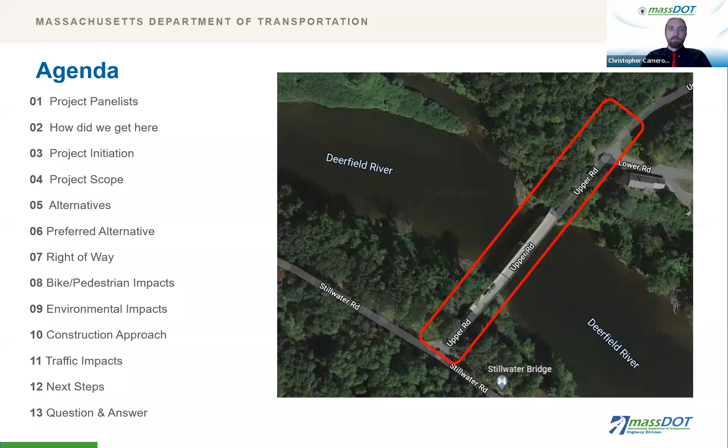Here's a summary of the key topics we'll cover in this presentation. It also shows the approximate limits of the project, which includes the bridge carrying Upper Road over the Deerfield River, as well as the immediate approaches. At the end of the presentation, we'll have an opportunity for questions. To help better answer the questions posed, we have a panel listed here representing contributors and stakeholders of the project, including representatives of MassDOT, the project design firm Green International, and the town of Deerfield.

Now we'll take a closer look at why this project was initiated. There are several reasons why this bridge has been selected for a full replacement by MassDOT. Those familiar with the existing bridge may recognize the weight posting sign shown in the photo. This signage is in place because deterioration to the bridge over time has reduced its load carrying capacity below the federal minimum requirements for certain trucks.

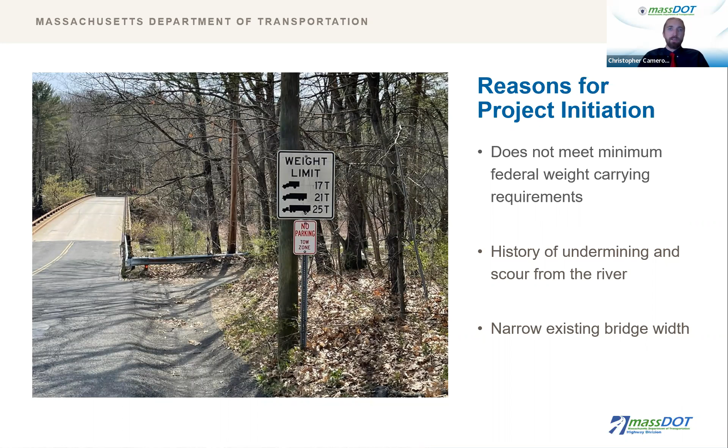Many of you may also be aware of the prior rehabilitation projects on the bridge piers within the limits of the Deerfield River. High flood events like Hurricane Irene have caused scour and undermining of the pier footings. Scour is the underwater erosion of the materials below the footings. Lastly, the existing bridge width is substandard for the roadway's classification, as well as for the needs of the local community.

Here we have some photos of the existing bridge that highlight the deterioration just mentioned. On the left is a photo of the existing bearings, which are over-contracted. These bearings are intended to accommodate the expansion and contraction of the bridge beams due to hot and cold temperatures. However, they're no longer performing as intended.

The photo on the right shows the existing concrete bridge deck from below the bridge. The concrete bridge deck supports the roadway and the bridge railing. You can see that there's missing concrete material and exposed steel reinforcement that is rusting.

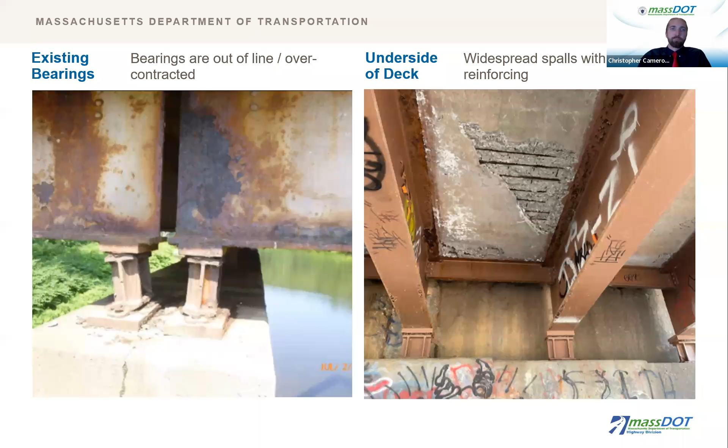The photo on the left here is one of the existing bridge piers. You can see the steel sheeting that surrounds the footprint of the existing pier. This is part of the repairs performed after Irene to stop and counteract the scour and the undermining of the bridge footing caused by that high flood event.

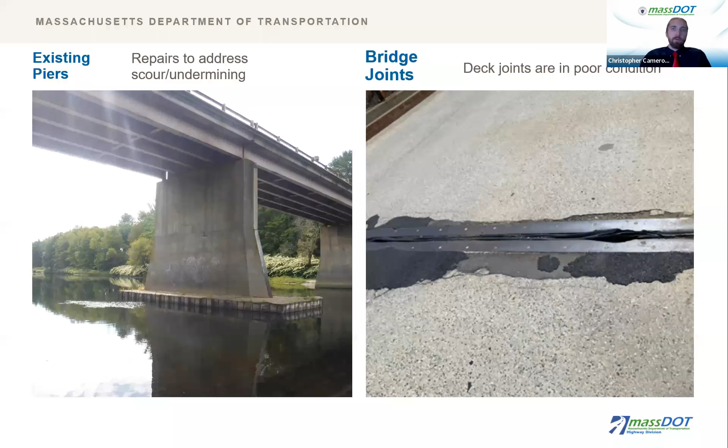On the right is a photo of the bridge joints, which are visible on the top side of the structure. These joints are in poor condition and are not functioning as intended, allowing runoff and salts to leak into the steel beams below. The photo on the left shows the deterioration and corrosion of the existing steel beams below the failing bridge joints. The corrosion from the water and salts causes loss of the steel material due to rusting and is the primary reason for the reduction in the load carrying capacity.

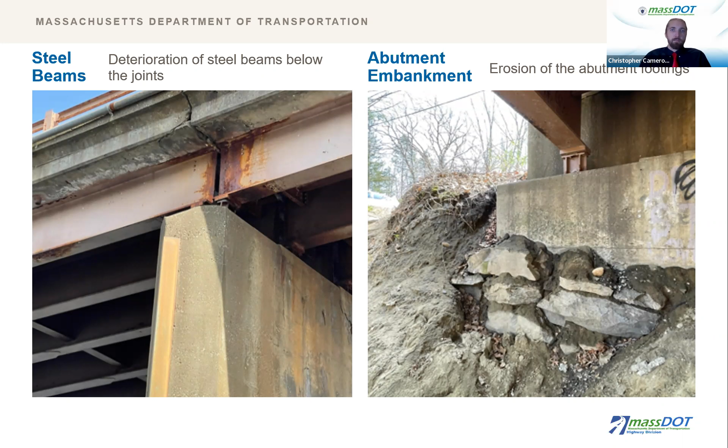On the right, you can see evidence of erosion even at the end of the bridge. The high flood events the bridge is now seeing more frequently are greater than what was anticipated in the original design. Now that we've identified why the project is needed, we'll delve into what we hope to accomplish.

There are a lot of components to this project, but the project scope can be summarized with a couple of key objectives. Our goal in replacing the existing Stillwater Bridge is to provide the community with a new structure designed to all the current standards that better serves the needs of the local community. To do this, we need to meet all load carrying minimum requirements, and provide a wider overall structure that matches the widths and geometry of the approach roadways.

We will design the new piers and abutments based on the current code updates for the magnitude and frequency of large storm events. The existing bridge allows runoff to fall directly into the Deerfield River, while our new design will contain and treat this runoff. We also plan to adjust the north approach roadway to improve sight distance and rideability by flattening the vertical curve.

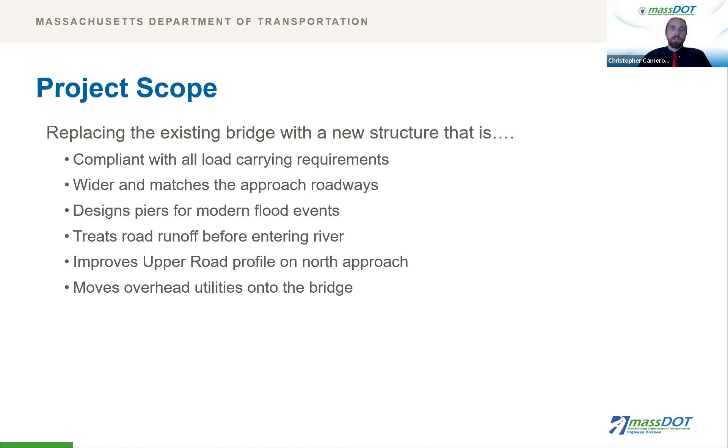Lastly, our plan, based on early coordination with the utility owners and stakeholders, is to bring the overhead wires that cross the river onto the bridge to improve access and maintenance. To achieve our project scope, there were several alternatives to review early in the design process. For the structure itself, we reviewed the advantages and disadvantages of rebuilding the abutments and piers in the same locations or building them in new locations to eliminate one of the piers.

The existing bridge is shown in the top left, which is a 4-span configuration and has 3 piers. The sketch on the bottom left is a 3-span configuration with only 2 piers within the channel. We also reviewed options for using shallow foundations or deeper foundation types like steel-driven piles. This decision is primarily dictated by the results of the soil investigation performed as part of the design process and the bedrock profile.

Lastly, we knew that a wider bridge was required, but we reviewed options for widening. The bridge could be widened to the west, to the east, or symmetric about the center line. These options each had different impacts on right-of-way, permitting, and traffic accommodation.

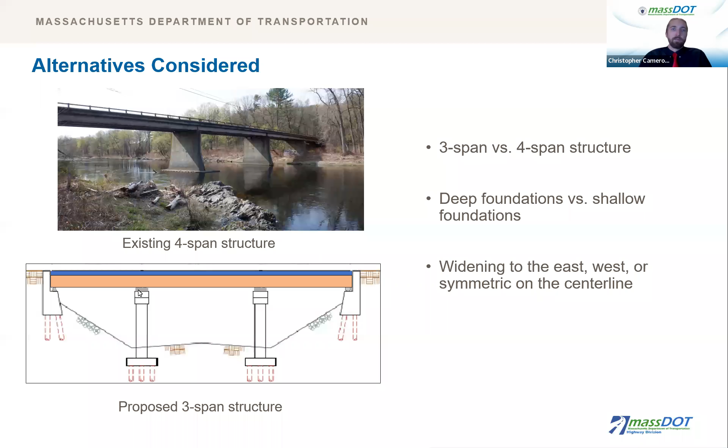The previous slide discussed the alternatives considered for the permanent structure. We also reviewed options for how to build the structure and the temporary impacts on traffic. Both a full detour of Upper Road through the project limits, as well as a staged construction approach, were considered. For the staged construction option, only a 1-lane alternating approach was considered viable due to the site constraints as well as the narrowness of the existing bridge.

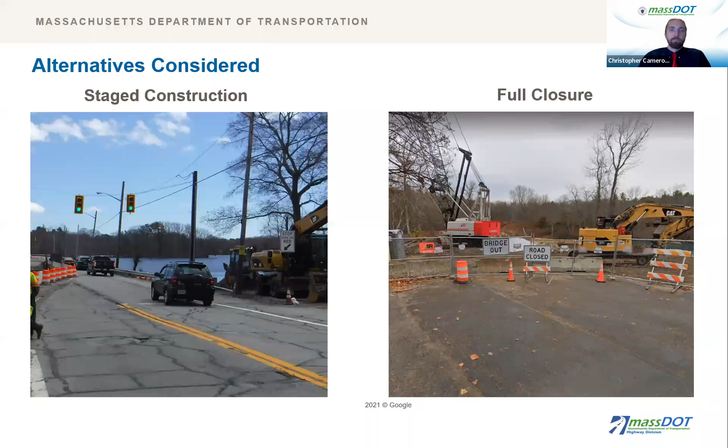We moved forward with a 3-span configuration with continuous steel beams and reinforced concrete deck. The change to 3 spans from 4 removes a pier wall from the limits of the river and places the new pier in a location that is less susceptible to scour based on the bedrock profile below the water.

The 3-span continuous steel beam structure is more efficient and will have a metallized coating to protect the beams from water and salts. The new concrete abutments and pier walls will be designed for the latest storm and flooding events.

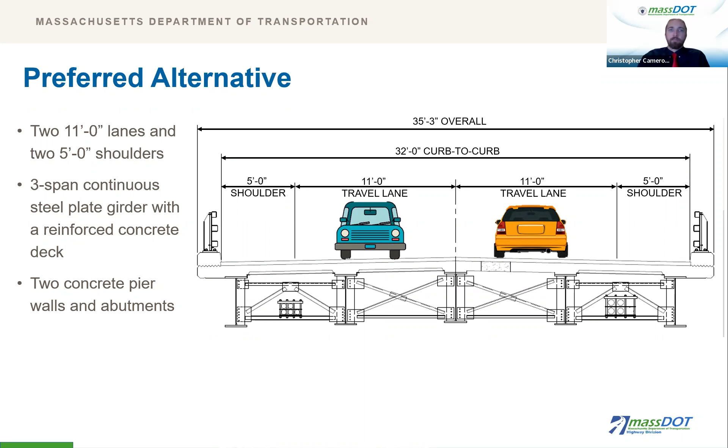Our efforts to develop the 25% design deliverables include reviewing the right-of-way impacts of our preferred alternative. Zach Feury from MassDOT's Right-of-Way Bureau will now go over the right-of-way process. Thank you, Chris. When the Commonwealth, acting through its Massachusetts Department of Transportation Highway Division, indicated it would accept this project for funding, the town of Deerfield accepted certain responsibilities.

One of these responsibilities is acquiring the necessary rights in private and public lands for the design, construction, and public use of this project. My function is to review and recommend procedures that the town of Deerfield will use in acquiring these rights. The procedures used must comply with both federal and state regulations.

Affected property owners' rights are protected under Massachusetts General Laws, primarily Chapter 79. And because this project is receiving federal funds, the property owner's rights are further defined under Title III of the Real Property Act of 1970 as amended. The current design plans indicate that the project requires 13 permanent easements and 5 temporary easements.

The property owners impacted by this project will be contacted by Town of Deerfield municipal officials, who will present the proposed impacts to each owner and discuss the methods by which the needed rights for the project may be acquired. Frequently, municipalities will appeal for donations to minimize the acquisition cost for the community. Donations, however, are not required, and property owners are entitled to appraisal, review appraisal, and just compensation.

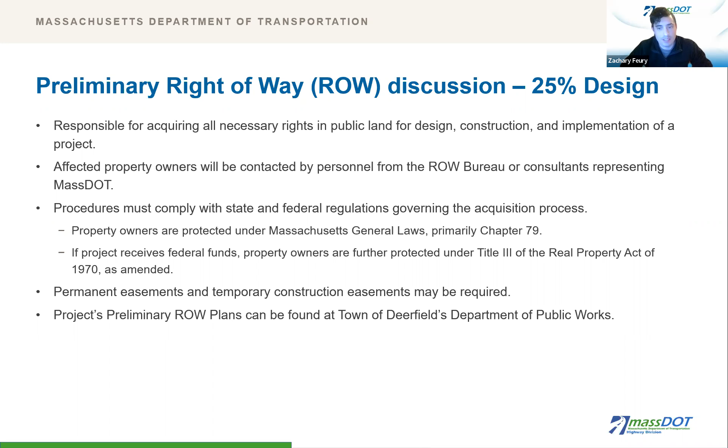Right-of-way documents will be provided to each owner to help them understand the acquisition process and how the project affects their property. Copies of the right-of-way plans will be made available to interested parties through the Town of Deerfield's Department of Public Works. And lastly, I will be available after the presentation to help answer any questions. Thank you, and back to you, Chris.

Thank you, Zach. Now I'd like to mention bicycle and pedestrian accommodations. All MassDOT projects consider impacts to bikes and pedestrians. Our proposed bridge section increases the shoulder width from 1 foot to 5 feet.

This will help to remove a constraint to any future bicycle or pedestrian facilities that may be brought to the area. However, these items are not part of our bridge replacement scope due to limited funding, environmental and right-of-way impacts, as well as a low demand for bicycle and pedestrian access. The wider shoulders will also provide increased clearance for farm equipment, which frequently crosses the bridge.

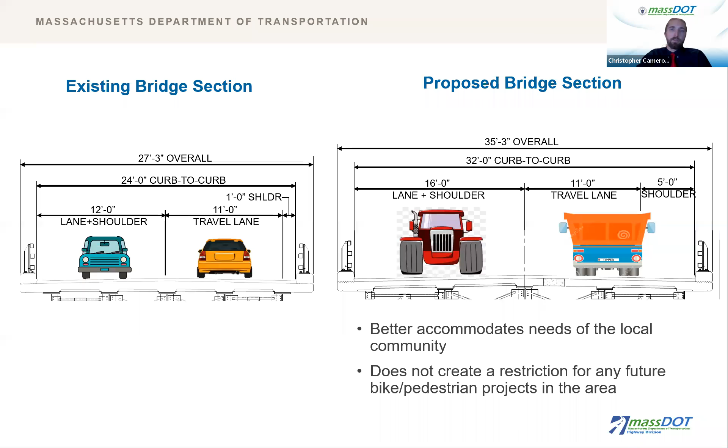How will this project impact the environment and other resources? No permanent resource impacts have been identified from this project since the new bridge is within a similar footprint to the existing structure. There are multiple environmental permits that will be obtained as part of the design process for both the final condition and the temporary impacts from construction. However, these are within the normal process of a bridge replacement project over the Deerfield River.

Our permitting process will also identify potential wildlife habitats and address impacts to vegetated wetlands. There are very minor impacts to the adjacent fish and wildlife parcel to the east, and we have already held early coordination meetings with them, along with the upstream dam and adjacent property owner, Great River Hydro.

Constructability is an essential consideration during the design process as well. As noted earlier in the alternatives section, a full detour and staged construction were both evaluated. The current design is based on using staged construction with one travel lane being maintained during construction using temporary traffic signals.

Conventional construction techniques will be used with no accelerated techniques or nighttime work anticipated. At this time, we anticipate construction to take 3 years due to the staging and the scope of work within the river.

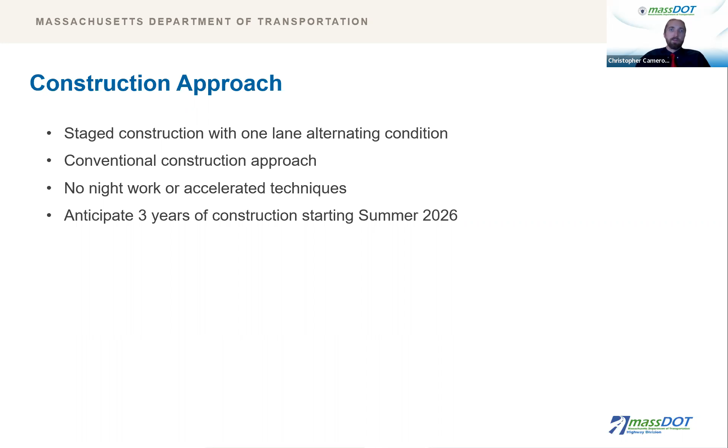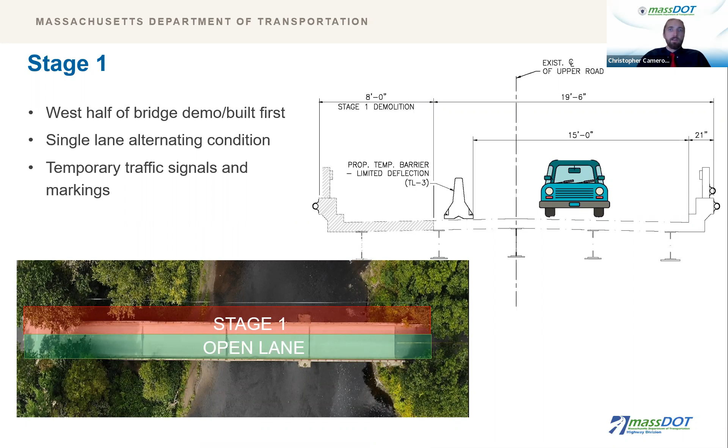During stage 1, you can see the typical section graphic. A 15-foot wide lane will be maintained on the existing bridge. A portion of the existing bridge will be demolished, and a portion of the new bridge will be constructed on the west side, as shown in the plan view. Temporary traffic signals will be installed on either end of the bridge to control the one-lane alternating condition. The 15-foot wide temporary lane is being provided to accommodate larger equipment as well as for winter conditions.

During stage 2, the open lane and work area are flipped, as you can see in the plan view graphic. Traffic is now shifted onto the newly constructed western portion of the bridge, and the eastern limits can be demolished and rebuilt, as shown in the typical section.

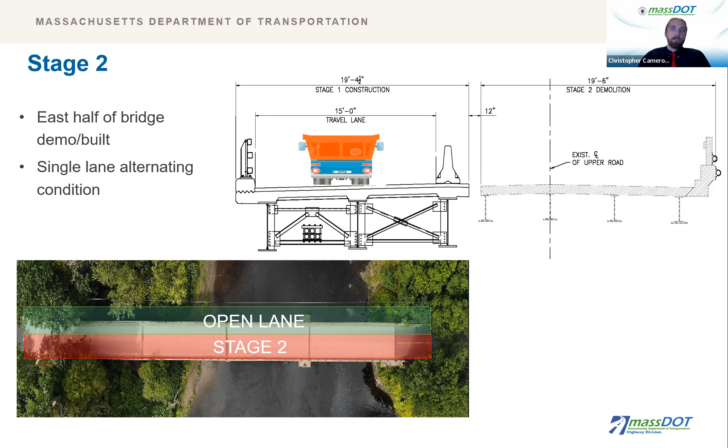There will be impacts to traffic based on the staged construction just discussed, based on the one-lane alternating condition. The temporary signal timing will be optimized for safety and traffic accommodation to reduce delays as much as possible while allowing for emergency overrides.

It's still early in the design process, but we anticipate that certain deliveries and crane activities will require a full closure of the bridge for short windows of time. This is due to safety concerns and will not be a frequent occurrence over the course of the project. These closures will each last less than a day, oftentimes less than an hour. When the closures occur, the detour route shown on the screen is the proposed detour route. We plan to coordinate with the town to determine the best ways to alert the traveling public to these short-term closures during construction.

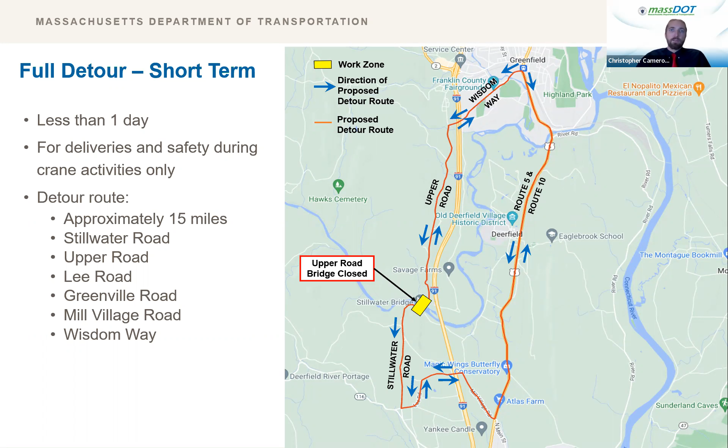As part of the improvements to the project, the vertical profile of Upper Road on the north approach is going to be adjusted. During stage 2, we anticipate there will be a 2 to 3 week period where temporary regrading work will need to occur to reconnect Upper Road and Lower Road at the intersection. While this regrading work occurs, the detour route shown on the screen will be in effect for Lower Road.

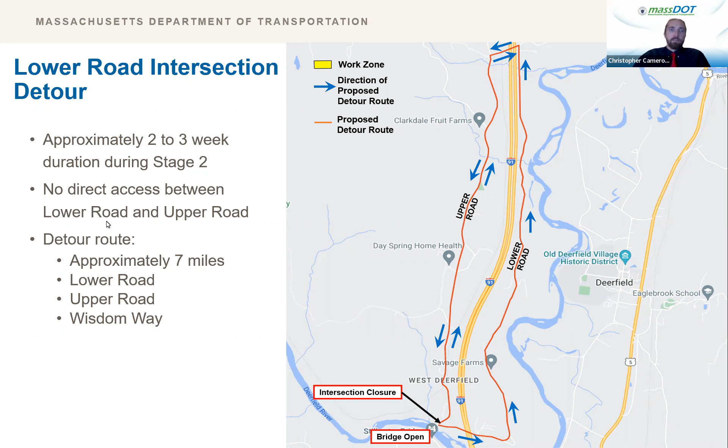For the staged construction, 1-lane alternating condition, and for the 2 proposed detours, a combination of static signage and portable changeable message signs will be used by the contractor to alert drivers of the traffic pattern changes. Here are some examples of that signage.

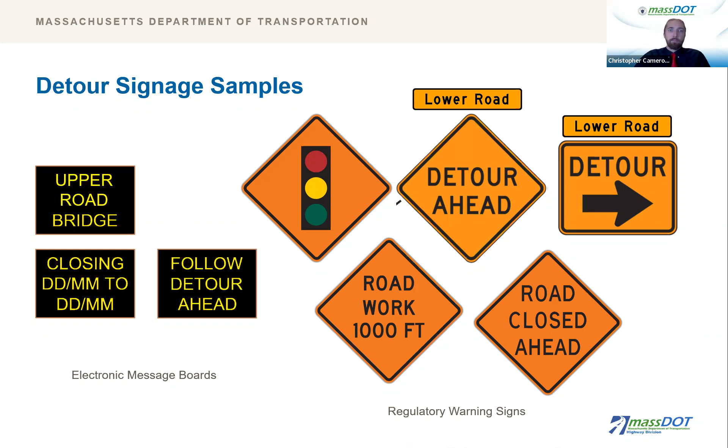Now that we've walked through the project, let's go over the next steps. After the hearing, we'll advance our design to the 75% design level by summer of 2023. According to the latest project schedule, the final design of the bridge is on track to be completed by fall of 2023. You'll notice the project is not anticipated to be advertised until the beginning of 2026. The reason for the lag between final design and advertisement is based both on the availability of funding and for allowing adequate time for permitting and the right-of-way process.

The project also has property impacts to Great River Hydro, the owner and operator of the upstream dam. Review of the project impacts relative to their federal permit introduces another layer of complexity. We've already held an early coordination meeting with a representative from Great River Hydro and will continue to be proactive during the design of the project. Keeping the public informed will be an ongoing effort coordinated between MassDOT and other stakeholders.